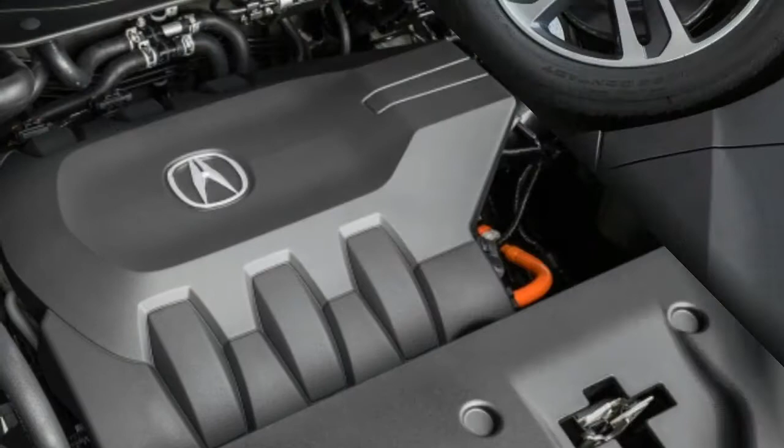We do need to examine the system in some detail to understand how all this affects the MDX as a whole, so let's go toe-to-tail.

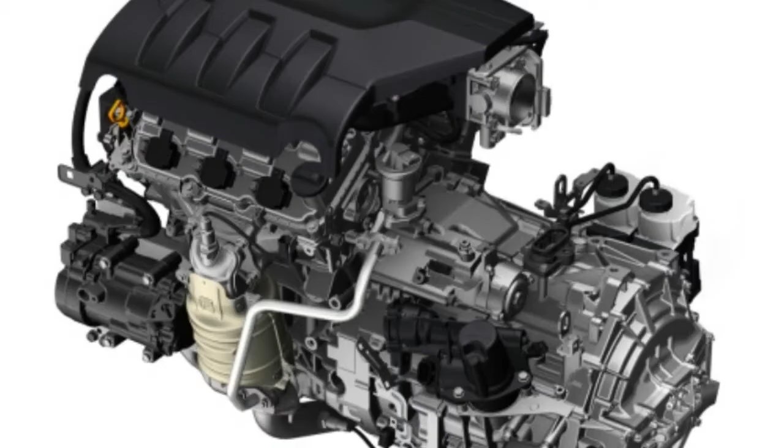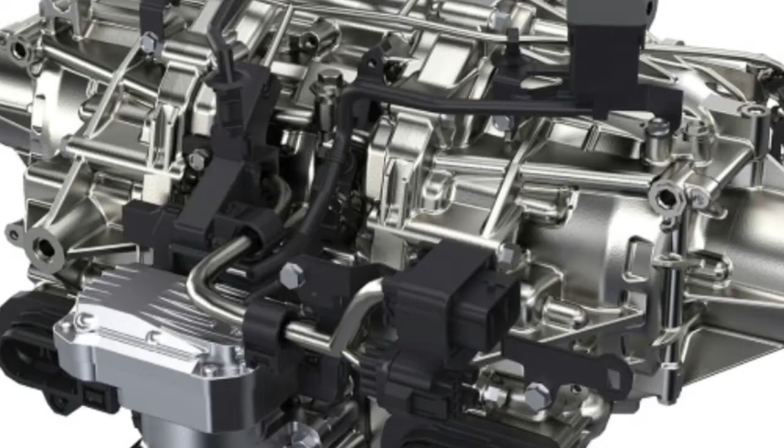Up front is a transversely mounted 3.0-liter V6 making 257 horsepower and 218 pound-feet of torque, as well as featuring i-VTEC and cylinder deactivation. It's slightly smaller than the 3.5-liter V6 found in the conventional MDX and many other Honda and Acura products. Attached alongside is a Honda-produced 7-speed dual-clutch transmission that has a 47 horsepower, 109 pound-foot electric motor generator stuffed inside.

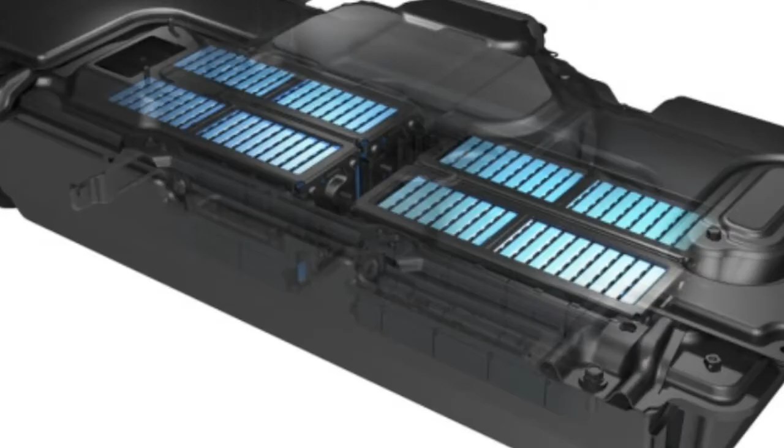Amidships are the battery pack and the electronics to control it, and stretching aft from there are large cables feeding power to a pair of electric motors that reside in a single housing, one for each wheel. Together, they produce electron witchcraft and torque delivery wizardry, and add 72 horsepower and 108 pound-feet of torque to the mix.

The total system output is 321 horsepower and 289 pound-feet of torque, a gain of 31 horsepower and 22 pound-feet over the conventional MDX SH-AWD.

Beyond the raw numbers, there's the remarkable subjective benefit of the Sport Hybrid's drivetrain. Engine start-stop events are quiet and smooth, nearly imperceptible when underway, in stark contrast to the too perceptible shudder of competing engines kicking on. The electric motors, mainly the one residing in the transmission, add in power to make up for the lull during a shift, making shifts up or down seamless, as well as providing regenerative capacity.

And from a dead stop the MDX will use the rear motors to move off, which overcomes a major limitation in most DCTs: low-speed lurchiness.

While there's some fuel economy benefit, the city rating jumps 45% to 26 miles per gallon in EPA testing. The 1.3 kWh pack isn't big enough to provide an EV-only mode, so it's best to think of it as an elaborate assist system for the gas motor that adds more power and smooths out some rough spots. Sure, it provides some green benefits on the side, but that's not the modus operandi of this equipment.

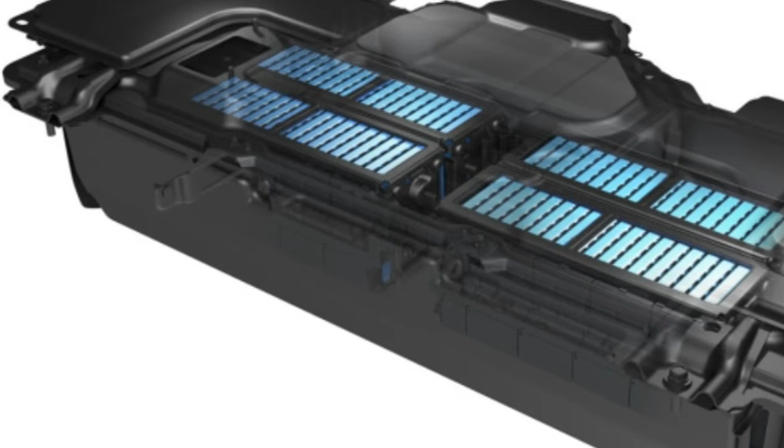When I use the terms smooth and near seamless, I'm not exaggerating. To be fair, it performs just as well in the RLX Sport Hybrid, and has for a few years now, so it's a shame that vehicle is so criminally overlooked.

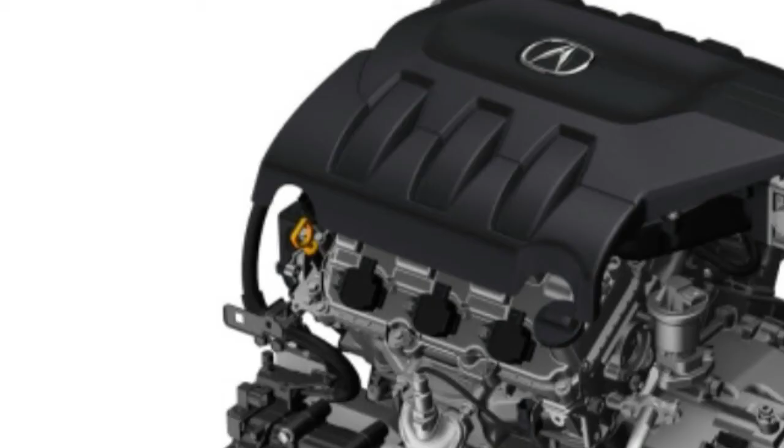This is just the first time the hardware's found its way into the MDX, and, as Acura hopes, more garages than the RLX. In the interim between the RLX Sport Hybrid and the MDX Sport Hybrid, Acura produced a new sports car. You might have heard of it. It wears a classic name but differs drastically in concept from its predecessor.

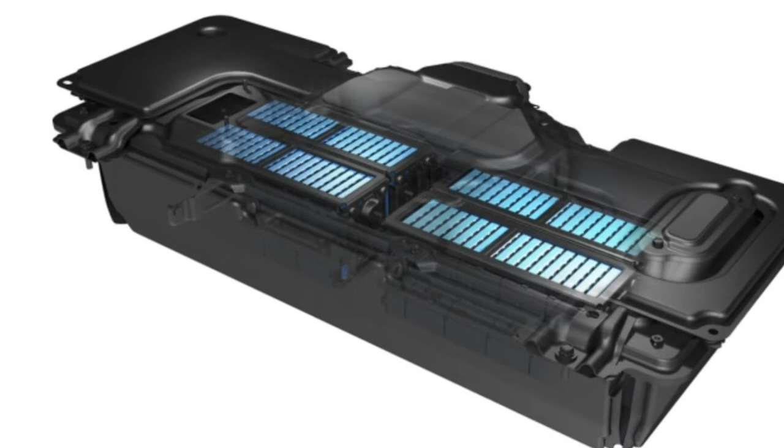The NSX uses some of this hardware in a slightly different way, but basically the rear twin motor unit and the battery cells are shared between the NSX and the MDX Sport Hybrid. The smaller, more energy-dense cells developed for the NSX result in a similar capacity to the RLX at a smaller size.

Instead of eating up a lot of trunk real estate, as it does on the RLX Sport Hybrid, the MDX Sport Hybrid's battery unit fits under the front seats and doesn't intrude on the passenger compartment at all. Just take a peek inside to discover there's no space-robbing hump or cargo area intrusion to give away the hybrid's game. That's because the third-generation MDX was designed from the outset to swallow this powertrain.

While there's some additional weight, about 220 pounds, all the MDX Sport Hybrid needs are some lightweight cross members to support the battery pack and a tweaked rear subframe to handle the additional weight. That means the vast majority of increased mass is due to the powertrain rather than structural reinforcements, and this is not offset by the use of lots of expensive exotic alloys or composites. It's mostly regular MDX save those cross members, said Ken Lance, an Acura engineer who patiently took every question I had about structural differences. He explained that the company takes a lot of pride in packaging efficiency. That's an engineer's boast if I've ever heard one.

The Sport Hybrid gains body-colored lower side sills and little fender badges. About all there is to distinguish it from a conventional MDX, but behind the A-pillars the body is also mostly pre-facelift MDX. Like its conventional sibling, it's been de-beaked.

That large chrome strip in the grille has been replaced by the diamond pentagon grille treatment. The multi-element headlights also grow in size, and gain some company in similar-looking fog lights nestled in a more complex lower fascia. Compared to the 2016 models, it's more handsome, but considered as a whole, it's distinctive at the expense of attractive. These hawkish, angular family styling tropes really hold the MDX back, although neither of its main Japanese competitors, the Lexus RX 450h or the Infiniti QX60h, are anything to shake a stick at.

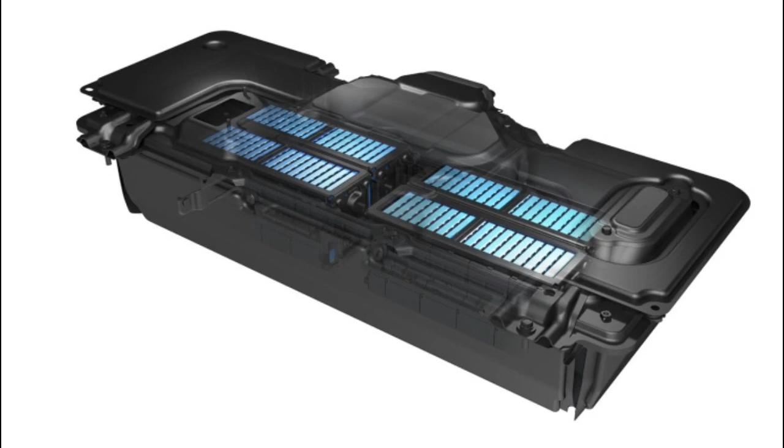So the MDX Sport Hybrid stands a bit apart from the crowd. Its innovative and phenomenally capable drivetrain is perfectly engineered to provide an exquisite but subtle experience that takes some concentration to appreciate. If you consider the contemporary zeitgeist, attention spans aren't really our strong suit right now. If you can sit still long enough to savor what the MDX Sport Hybrid has to offer, you'll probably enjoy it immensely.